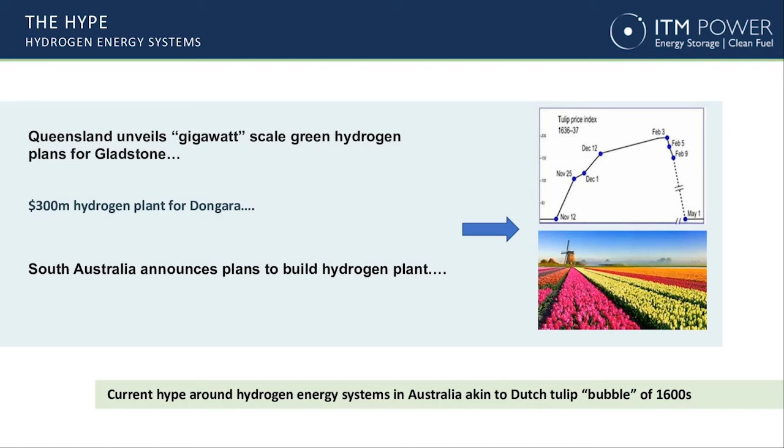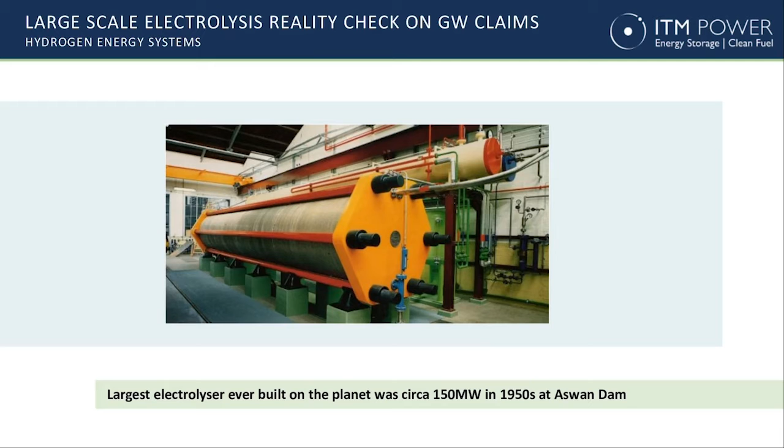A little quick introduction. We're now part of the Linde Gas group as of 3rd October last year, so we're proud to be part of the Linde family, which also includes BOC Australia. I guess one of the things I want to make up front, there's been so much hype around hydrogen in the Australian market that we need to calm down a bit and take stock of what's really happening in Europe and the USA, and learn from best practice. Let's not get carried away as we've done in some of the press recently about gigawatt scale projects, which frankly aren't feasible at the moment. In fact, the last gigawatt or anything close to hundreds of megawatts was actually developed in the 1950s - it was an alkaline electrolyser at the Aswan Dam. So please take note of that, ladies and gentlemen.

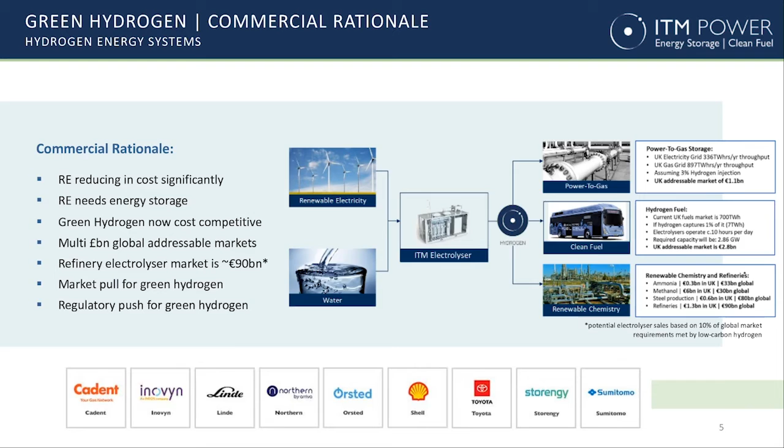What do we make? The white box shown in the middle of that slide there - we're pleased to make that equipment for people such as Toyota, Shell, and others around the world. Very high standards in the oil and gas industry we have to meet for producing hydrogen onsite through electrolysis. Basically, we're taking renewable energy and wastewater, preferably, and turning it into hydrogen gas and also oxygen and waste heat. We do 3 things with that: we generally put it into gas networks to decarbonise natural gas, we use it in our mobility fleets - cars, trucks, buses, ferries, and aviation shortly according to Linde - and renewable chemistry, using it to make other chemicals such as ammonia. As I said, we've been in this industry working for clients like Shell for 2 decades.

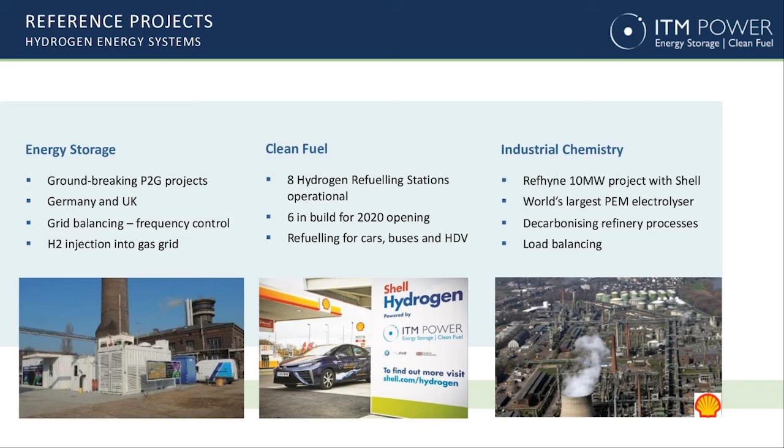I guess the first decade was about R&D and the second decade was about commercialisation. So again, we've got reference sites around the world in power to gas, on forecourt refuelling stations, and now the largest electrolyzers in the world at the Shell Wesseling refinery in Germany. And this slide here gives you a bit of an idea.

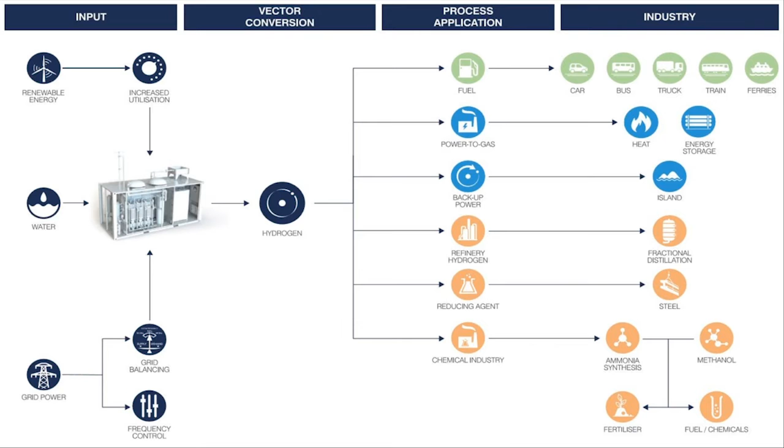People refer to hydrogen as the vector coupling molecule. Unlike an electron, we can reach a lot of industries and decarbonise and also help with the economics of those industries. We were part of the Linde Gas Group as of October last year, and thanks to their investment, we're building the world's largest electrolyser factory that I would invite you all to post-COVID for the launch. But at the moment, we're all stuck in Sheffield, and that's manufacturing around 1 gigawatt of PEM electrolysers a year.

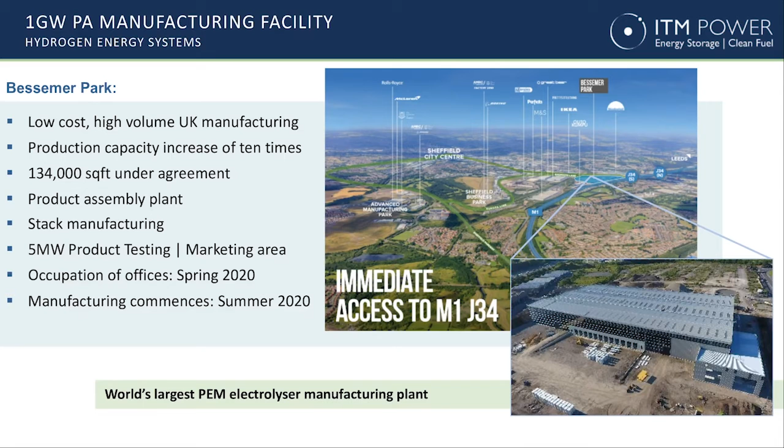So Chief Exec Graham Cooley wasn't to be outdone by Elon Musk. So that's our gigafactory. I guess very proud of the work that our colleagues are doing, not only here in Australia, but also internationally.

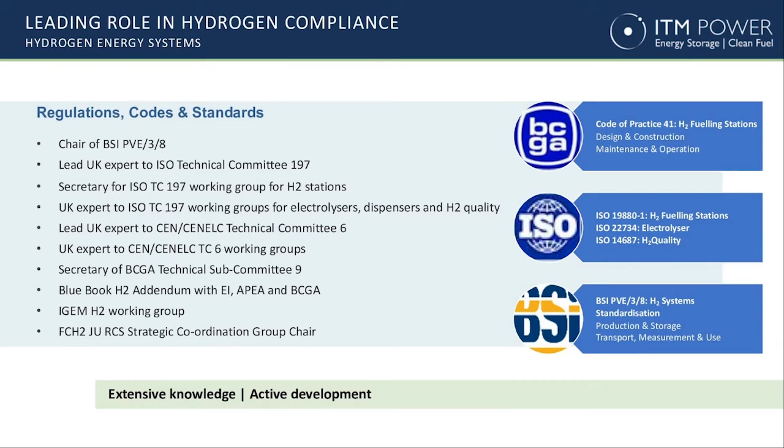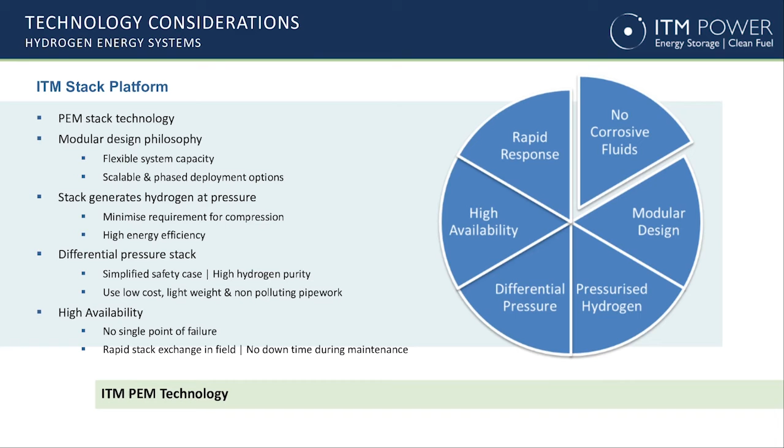Working on various codes and standards to make sure that hydrogen is deployed safely, both in industrial and public domain. One of the things I found researching this area for about 6 years as part of my PhD was that the particular technology used by ITM is quite innovative in terms of its ability to turn on and off rapidly and basically be used in a safe manner for scale up, ultimately to gigawatt scale.

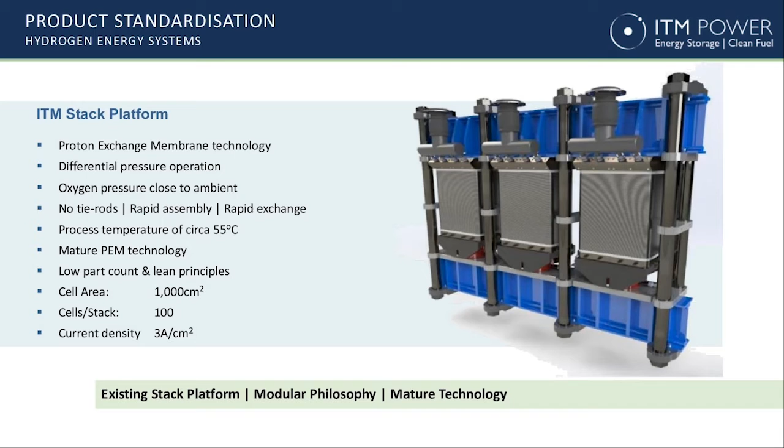And this stack image here gives you an idea of how compact this is. That's a stack that fits into a 10-foot ISO container. So in the space of 1 decade, they've moved from 10 kilowatts in that footprint to basically 2 megawatts in that footprint. So like solar panels, electrolysis has rapidly increased its current density over that last 10-year period.

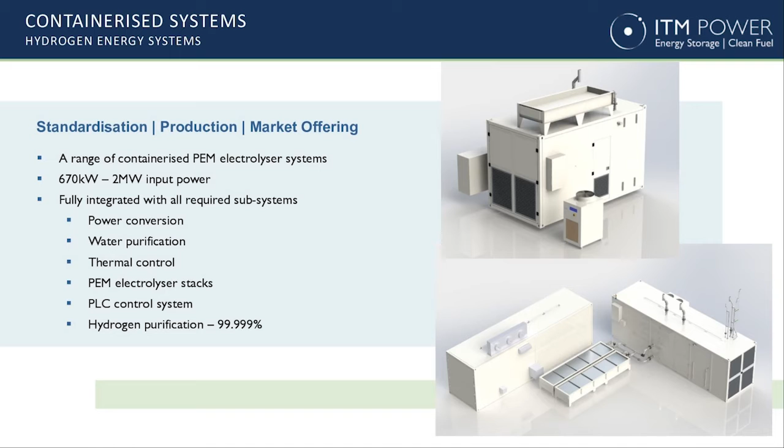Now that it's got to a point of commercialisation, these units indicated here have actually been deployed. I'll talk shortly about Australia, but in Melbourne at Toyota Altona and at Brisbane in the BOC Bulwer refinery near the Eagle Farm Airport.

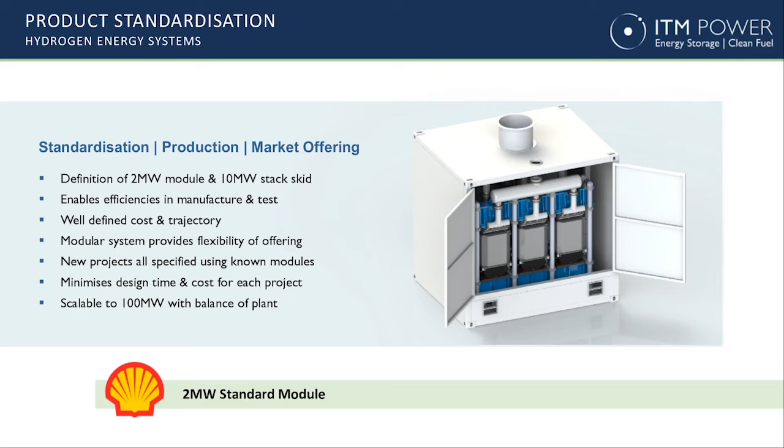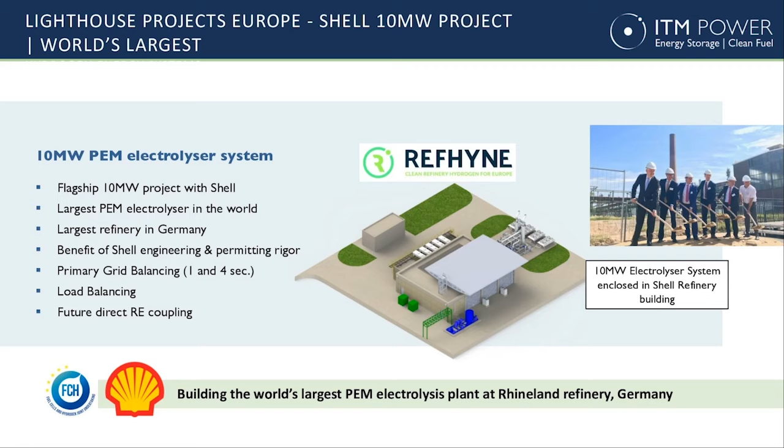Because of the Shell project, they arrived at a standardised 2 megawatt module. So that module you see there on the screen is actually in the 10-foot container, and that's deployed across a gang of 5 in the refinery situation I showed you earlier. That's one. Plenty of action happening locally here shortly in Altona and shortly in the BOC Bulwer farm where we're releasing the products here locally.

This gives you an exploded view of the configuration of the Shell refinery, and as you've seen, the 10 megawatt unit is made up of 5 2 megawatt modules shown there in the centre, and then all the balance of plant is external. So as we move up from 2 megawatts in capacity to the larger 10 megawatts, it's an external balance of plant rather than built in.

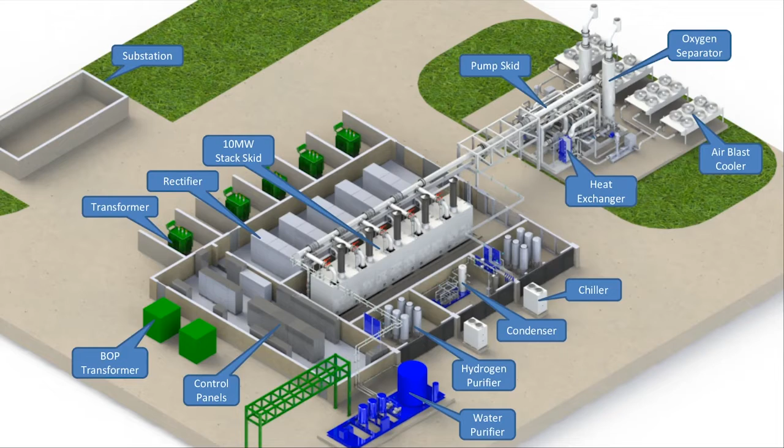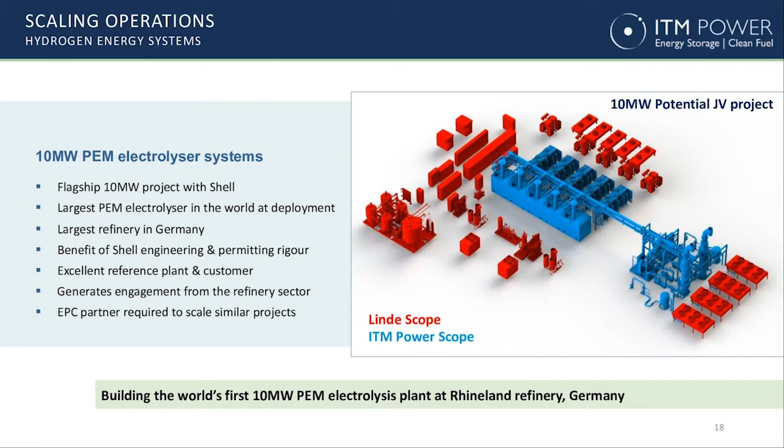And I guess where we play is in the centre section there in blue, where we're manufacturing the PEM electrolysers, and our partner Linde is making the balance of plant, so deoxy, drying, and also electrical conversion equipment.

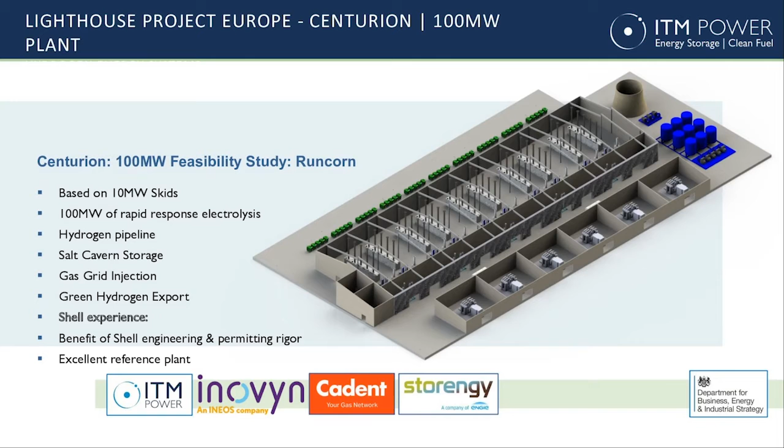Now that we've sort of passed the 10 megawatt mark, now we're up to 100 megawatt. There's a number of projects: the Runcorn project, power to gas injection, storing hydrogen gas in a salt cavern, and similarly happening in British Columbia off hydropower, so at the 100 megawatt level.

And again, we stick to the knitting. ITM manufactures the PEM electrolysers shown in blue, and Linde takes care of the balance of plant. As I mentioned earlier, the good thing about the PEM electrolysis as compared to traditional alkaline electrolysis is we can turn it on and off in under a second.

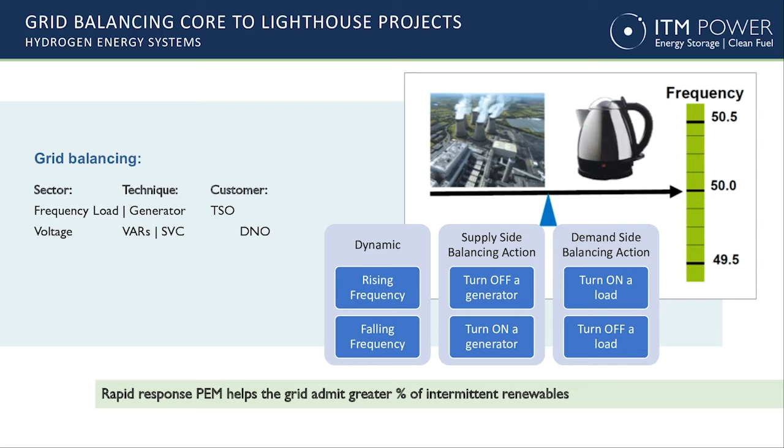This has market benefits for the national electricity market here in Australia, and certainly works to allow greater penetration of lower cost renewables, so more wind, more solar, without upsetting the balance on the grid. A very useful characteristic for the national electricity market moving forward. In fact, all of the projects that we've developed, both in the United Kingdom, Europe, and now in Australia, are connected to the electricity market for grid services, which creates another stream of revenue for the operator to offset the cost of producing the hydrogen in the first instance.

One of the other interesting things is we've seen some projects here in Australia: the Tonsley Park project with AGIG, the Jemena H2GO project in New South Wales, and also the ATCO project in Jandakot, Western Australia, where they're starting to look at how to inject hydrogen gas into the gas network.

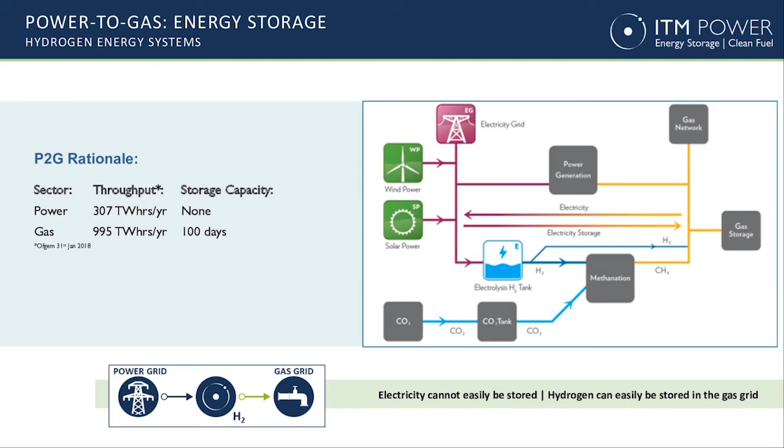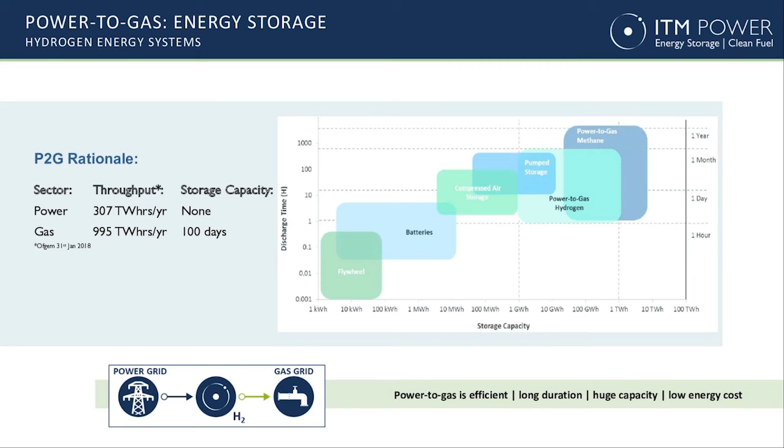Dr. Finkel and the COAG team with the federal government are looking at a 10% injection rate. One of the nice things about gas is that it can store energy long term. As opposed to a battery, which stores energy for half an hour, hydrogen gas can store energy over weeks, days, months, years. All of the projects in Europe around power-to-gas are now heading towards a 20% decarbonisation target and ultimately 100% hydrogen gas.

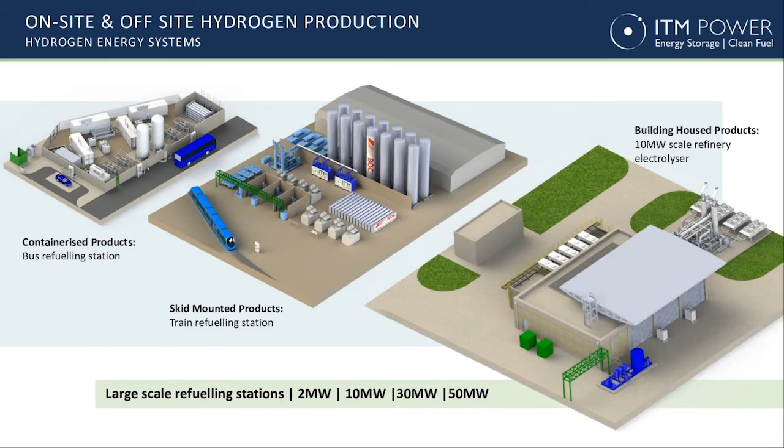If you scale up, we start to work now in trains and buses. We recently launched a bus program here in Australia - a network of 100 fuel cell buses across Australia, so that'll be coming to a capital city near you. And of course, moving up into trains, and ultimately ferries are starting to happen around the world with hydrogen fuel cells.

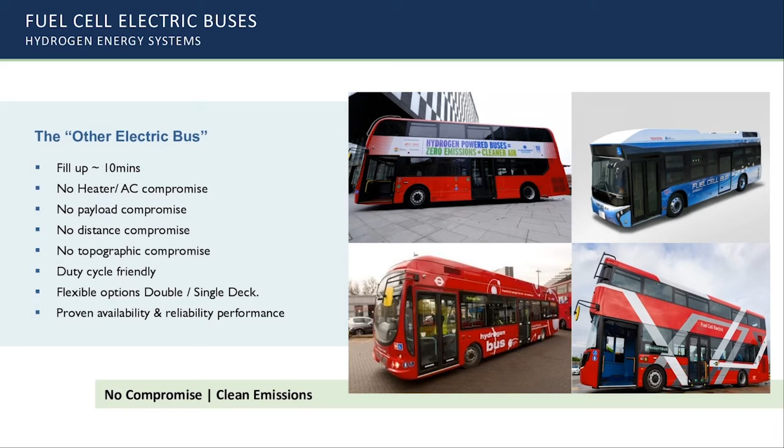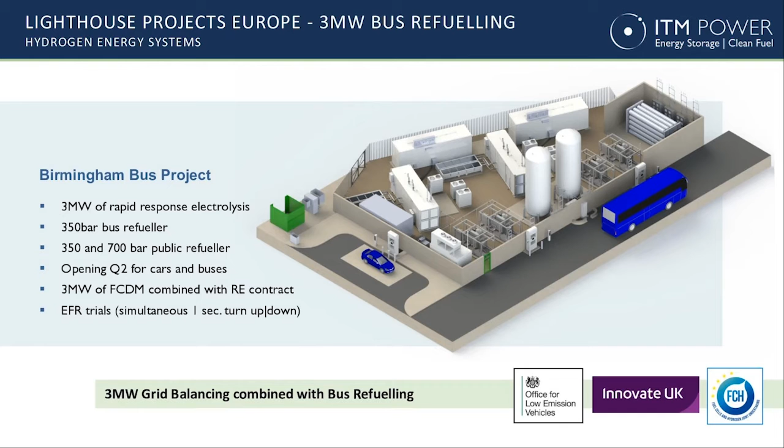Buses is where we started in London. We've now released the bus program, and particularly in New South Wales the state government's committed to transitioning all 8,000 public buses to battery electric and hydrogen fuel cell buses. Very exciting in New South Wales. Ultimately we seek to look at this as a public station for refuelling as well, so we're amortising the cost of those assets across the bus and car fleet.

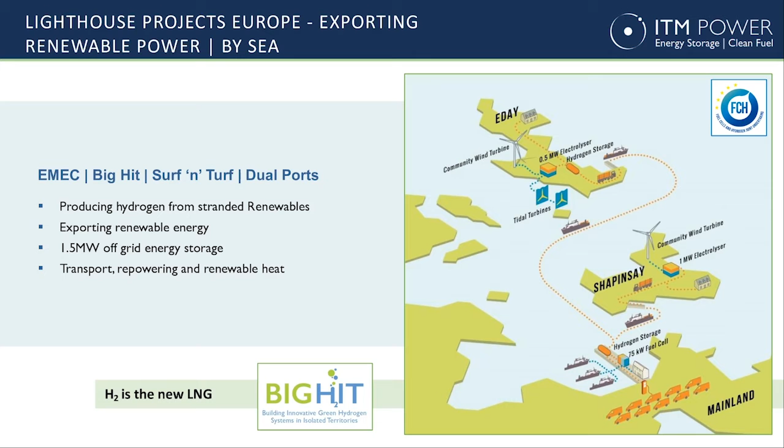Some of the work we've done in Scotland has implications. There's a new project announced up in the Daintree, heading towards a microgrid for hydrogen. Similarly, we're using stranded wind power in the islands across the north of Scotland to convert to hydrogen and ship that hydrogen to other islands for reuse in a fuel cell stack and in mobility for fuel cell vans.

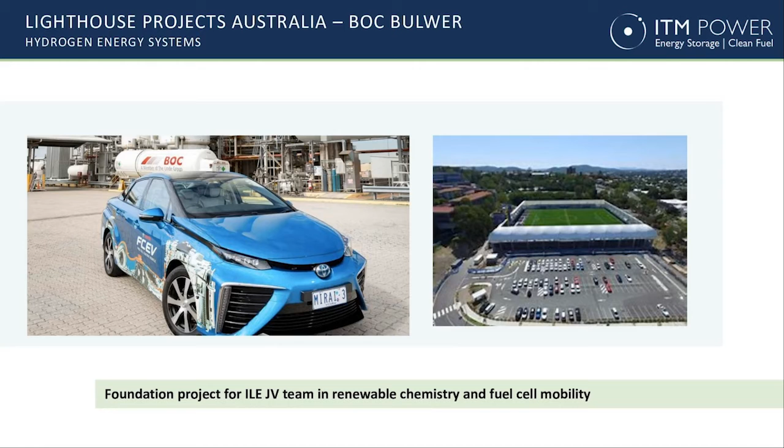Closer to home here in Queensland, QUT, in conjunction with BOC and the Queensland Government, is installing a hydrogen refuelling station at the Kelvin Grove campus. I hope that goes in very soon, because then I can start to refuel my Hyundai Nexo when it arrives.

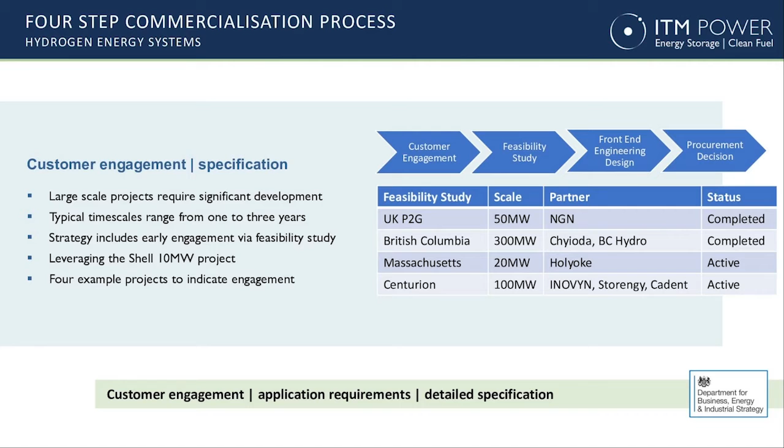We've made a lot of noise about engineering, working with Linde and local partners here. We have a very specific 4-step process to make sure we have a commercially successful and also very safe project. We'd like our clients here in Australia to follow suit and take a 2 to 3 year time frame to make sure these projects are commercially, technically, and from a public safety viewpoint successful.

Our recommendations: certainly talk to all stakeholders - interesting to hear from some of our colleagues from the water utilities, we certainly want your wastewater for future hydrogen projects. It's very important that it's socially acceptable. We should explore all opportunities across power-to-gas injection, mobility for buses, trucks and vehicles, and any benefits we can derive by helping with grid stability. When we originally did this seminar jointly with Engineers Australia and IChemE, we'd like to make sure trusted members of the organisation are used for the benefit of funders and insurers.

Finally, from an investment viewpoint, for projects going forward here in Australia, we prefer to do them as a toll project, where we're selling the gas basically as a service - a $1 per kilo rate - rather than asking clients to invest in projects directly. Money can be spent better on other projects, and we leave it to ourselves and Linde to invest in the projects moving forward. So, quite a tight time frame - hopefully that's 15 minutes, and we'd certainly welcome any questions.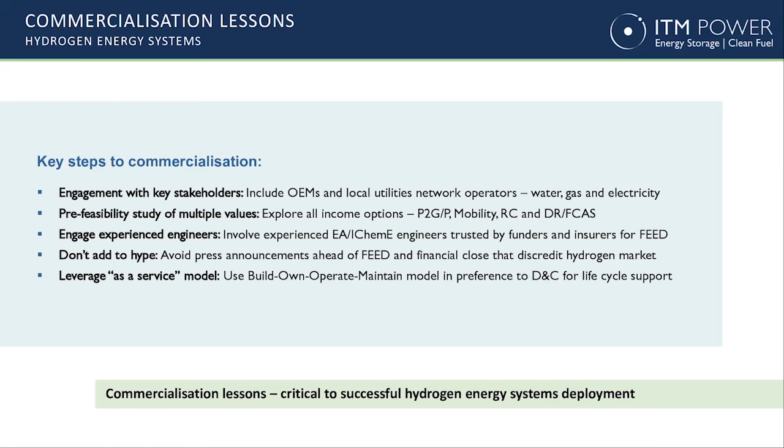Thanks again, Neil. Thank you, Emma. I hope you can all hear me okay. Yes, we can hear you. Would you like to turn on your video? I think I'll keep it off just for the bandwidth, just in case my connectivity is not that good. So I'll carry on. No problem.

Well, thank you very much, and thanks for that talk from Anil - it was quite enlightening on hydrogen. Just to give a bit more context, thanks Emma for the introduction. My background is in the hydrocarbons industry, right from when I graduated up to now, although right at the moment I am actually working in FMCG. But prior to that, pretty much most of my experience has been hydrocarbon. And I was requested to give this talk.

I've been fortunate in that I've worked right across various different hydrocarbon industries in different parts of the world. So the opportunity is to share the evolution of where we are right now in terms of the needs and demands in the energy sector, and also really focusing on emission control and where we're going in the future. As I am very much part and parcel of digital transformation, I also have included the need for us to bring digital into how we think as chemical engineers.

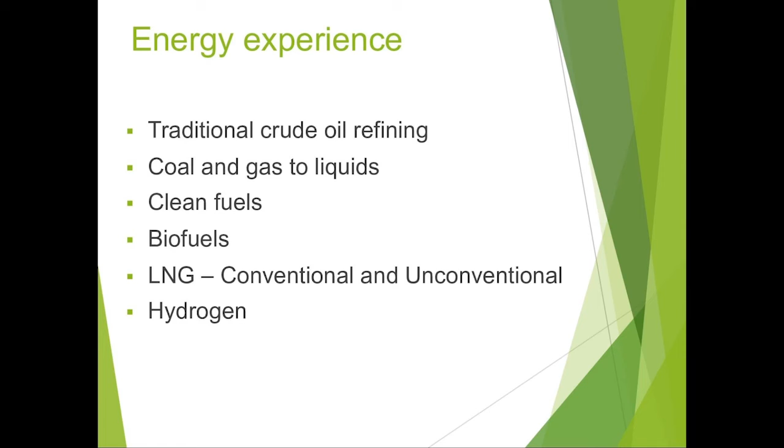Then back in the Australian context, I'll touch on the conventional and unconventional LNG - where do we stand at the moment? And I'll close off with hydrogen, but I think we've had a pretty good overview on hydrogen already, so I won't touch too much on that - just to give a bit of perspective on where we've come from, what our challenges are, and where we're going with it.

To contextualize the energy landscape, the Paris Agreement really puts a lot of pressure on countries and companies to act responsibly. Right across the board, globally, we see cities and countries taking initiatives, and companies stepping forward to put forward drives towards the 2030, 2050 plan in terms of going not just to carbon neutral, but also to carbon positive, which of course requires quite a decent shift in thinking on the energy landscape across the board.

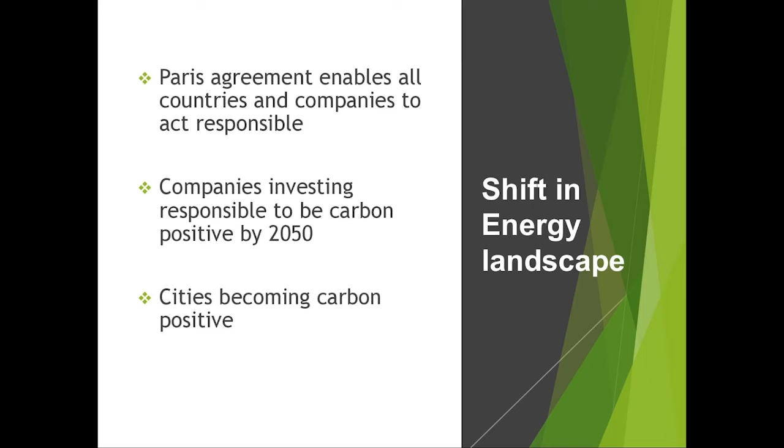Summarizing what I see as the hydrocarbon span based on my experience working in different industries - I'll start off with what is quite common for the Australian context, the conventional and unconventional LNG producers. As we know, we are a big exporter, and all the producers right across the east and west coast are exporting across to Asia.

However, where we stand right now is while unconventional coal seam gas production has scaled quite rapidly, there's still a question, and quite a bit of debate, about whether it's going to be continuously feasible as an economical solution, when it comes to how many extra wells you need to drill for coal seam gas versus conventional gas. So that continues to be a debate.

I think there's still an opportunity to really bring about more cost-effective conventional production, and I'll touch more on what I see as the digital twin. This is where it's important as chemical engineers to really step back and use the power of digital transformation - using analytics to optimize our operations, sweat the assets, because we have what we have. However, all of our assets are stretched in terms of energy optimization, sweating the assets, as well as reducing costs.

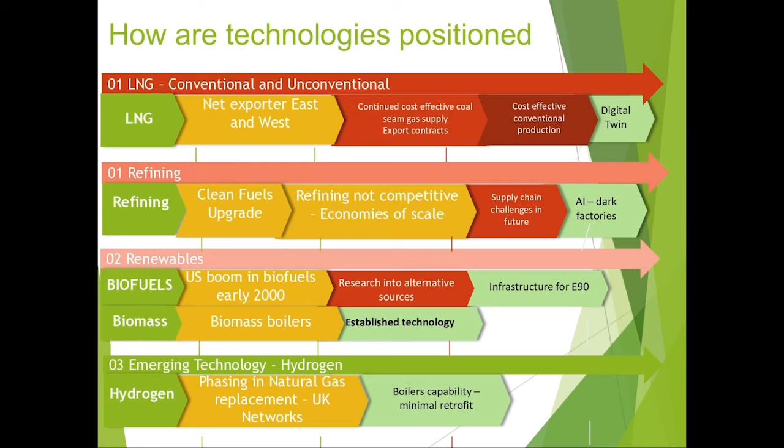All of our fuels, all of our energy sectors are quite dependent right across the board on all elements. Needless to say, hydrogen is picking up - still some way to go, but refining, traditionally LNG, all still continue to be a big part in playing towards a sustainable future.

In closing comments, I'd really like to touch on one of the important aspects of how chemical engineering needs to adapt to be at the forefront of digital transformation. As the world is moving forward in digital transformation, it's a very important part of how we need to think, adapt, and learn to fit in with the world of data analytics.

There are three key important roles in the energy sectors. One is to continue to innovate in parts of the world like the hydrogen industries, to sweat our assets, and this is where a lot of our operators have gone down the path of doing digital twins, which allows more data streaming, allows data to be processed into the cloud, whether maintenance related or process related. It allows so much opportunity to optimize, to do deep analytics to find opportunities where you might not see them for energy optimization.

So all of those perspectives of things that were not actually available to all of us are now available through digital transformation, and all of us need to upskill ourselves and think about this all the time.

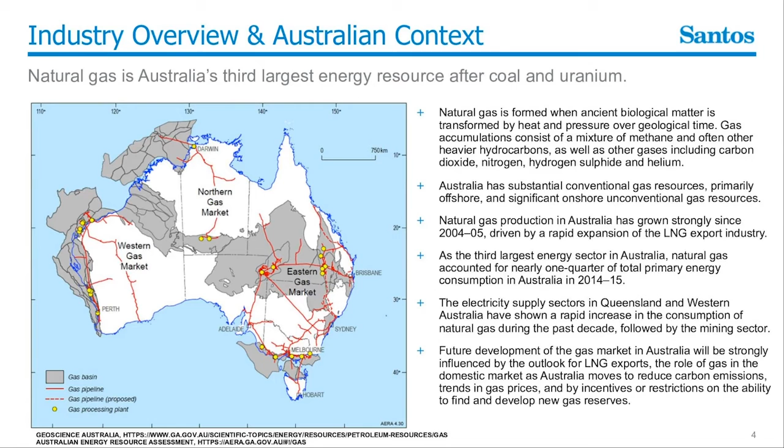So, look, very simple overview on the natural gas market. We could talk for hours on what this is, but I think the key takeaway here is significant infrastructure covering most states and most seaboards of Australia, both for export and for domestic use.

So about Santos. Look, Santos is an Australian company, 65 years now in the making. The first onshore gas discoveries in Australia came out of the Cooper Basin. It has the desire and the aim to be Australia's leading domestic gas supplier. We work in all of the domestic markets, both eastern seaboard, western seaboard, and the northern part of Australia, onshore and offshore.

Significant infrastructure position. Our current corporate strategy is focused on 5 core long life natural gas and LNG assets: the Cooper Basin in Central Australia, Queensland both east and west, New South Wales, northern New South Wales, Western Australia offshore, and northern Australia predominantly in the Timor Sea. Additionally, we have a non-operator position in Papua New Guinea.

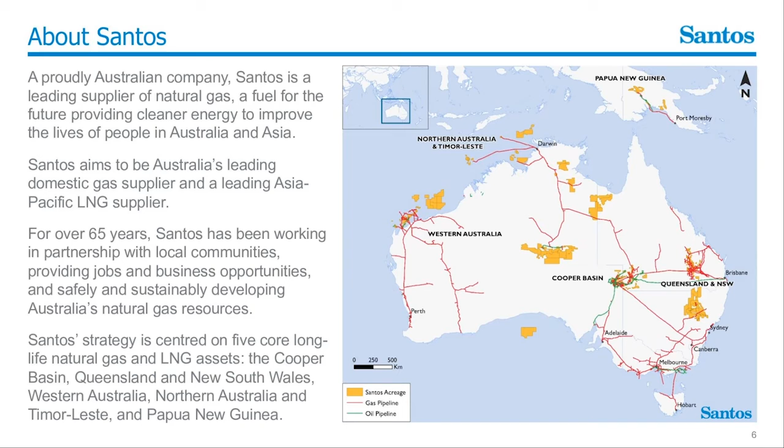Cooper Basin, the underpinning asset of Santos, where the company started, predominantly focused around the Moomba gas plant and the associated reservoirs and operations from there. Cooper Basin's an interesting operation, tight gas conventional, so it produces both gas and liquids products. Those liquids products head south and are exported from Port Bonython to various refineries or chemical users around Southeast Asia. In Queensland and New South Wales, we have, as Liz previously talked about, one of the unconventional LNG operations in the GLNG plant, again a coal seam gas operation converted to LNG and exported to Southeast Asia.

Recent acquisition by Santos in Darwin, the ConocoPhillips operations from the Darwin LNG plant and the offshore Bayu-Undan facility and platform. So we've taken operatorship of that through those acquisitions recently.

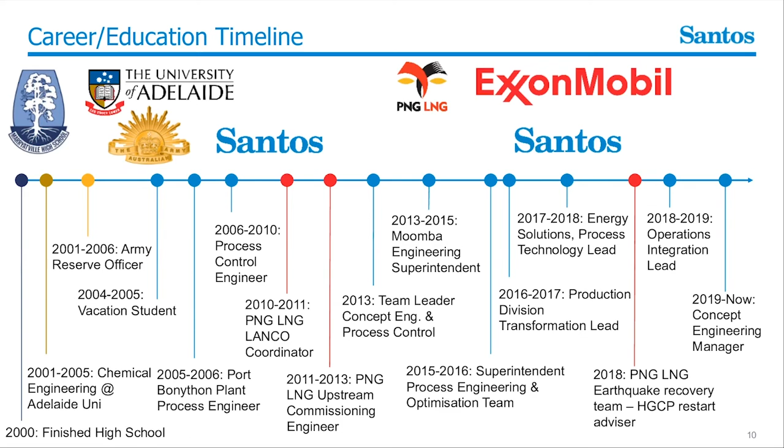Just very quickly going over the key takeaways - my early career, foundation career, working as a plant engineer or a process control and optimization engineer, with a lot of focus on efficiency, optimization, fuel usage, product spec optimization, and those sorts of things, with a focus on reducing footprint and enhancing efficiency. I spent the first 5 years or so of my career doing that.

I was then very lucky to get an opportunity to go to Papua New Guinea and work on the PNG LNG project. This is probably a really interesting one, working on a mega project - $18 billion of spend, or I think it ended up being nearly 19 by the time it was done. It was a significant expenditure and a significant amount of work undertaken. We had, at the peak of construction, nearly 11,000 people - don't quote me on the number - across all the operating sites. If you think about that, that's the size of a small country town.

As a consequence, all the infrastructure has to go in with building that - it's not just putting the steel on the ground, but also having little mini towns or camps and airfields and logistics transport routes and all those sort of things. With Papua New Guinea, the geography is very challenged - remote locations, minimal infrastructure. As part of that, we actually had to build one of the largest, or the largest, airfield in the southern hemisphere to get all the equipment in to build the Hides gas plant up in the highlands of Papua New Guinea. It's a fantastic role - really enjoyed the experience. It was quite interesting working with a mix of people from all around the world in a challenging location.

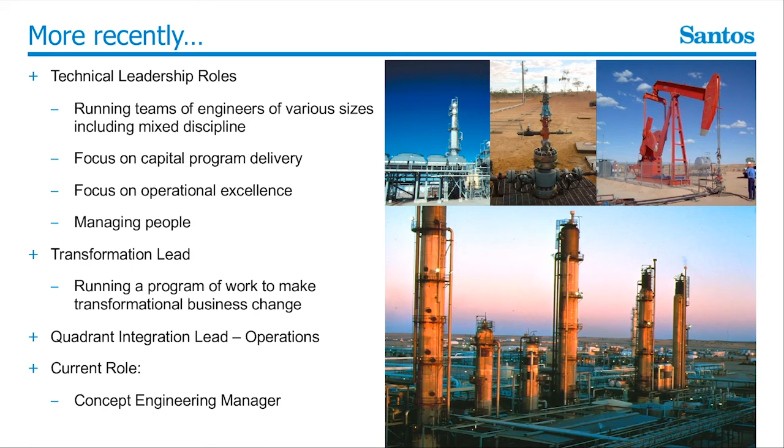On top of that, we've just entered FEED engineering design for a carbon capture and storage project at Moomba, where we plan to capture the CO2 emissions from that facility and inject them into depleted reservoirs. That's quite an exciting project, and I look forward to seeing it get done.

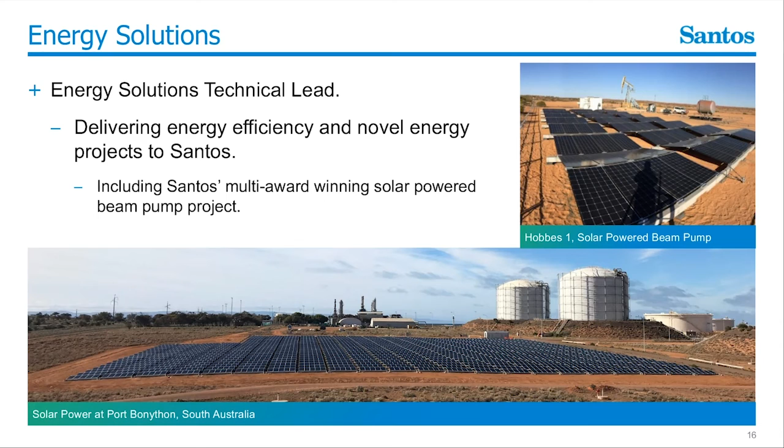So that's basically the summary of that little thing. But it was just one of those weird and wonderful things where three months of your life go past on the basis of a phone call you weren't really expecting.

And that's me done in a sort of lightning round.